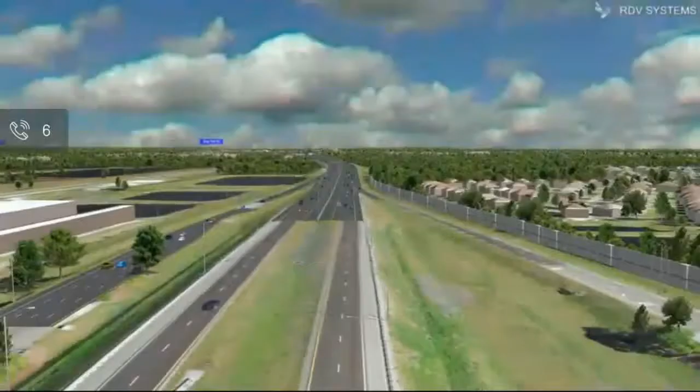So first, this may take just a couple seconds to start rolling, but we'll look at the video of the tour. We start at the southern end of this project near Narcoossee Road. You'll see Stratford Point with its proposed sound wall on your right.

We're traveling northbound on State Road 417. Ahead of you, you'll see a structure that stretches across the road. That's the new electronic overhead sign gantry. Continuing north, the bridge that we're about to cross spans the OUC Railroad.

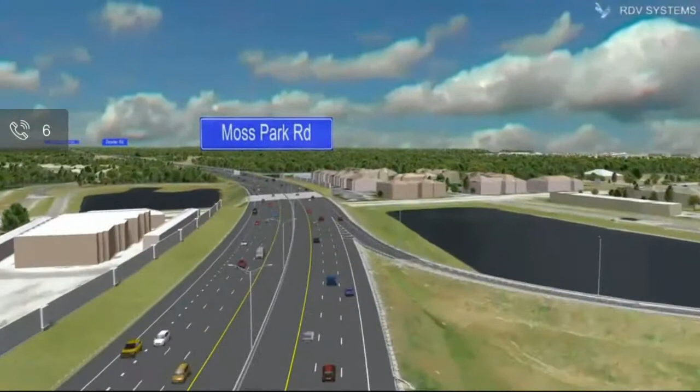And that's Nona Terrace coming up on your left. You'll see the proposed sound wall adjacent to the community. Approaching Moss Park Road now, you see the Oasis at Moss Park on the right and its sound wall. Across State Road 417 is the Villas at East Park. Again, its proposed sound wall runs the length of the community.

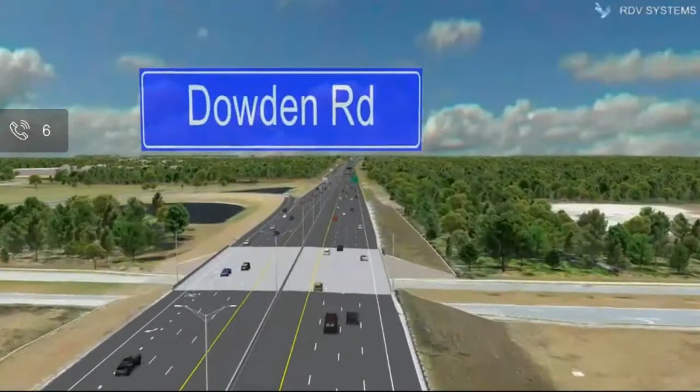And right now, we're passing the exit to Dowden Road on our right. And approaching Dowden Road, there's another one of those overhead sign gantries. You're getting a good sense now of how the expressway is being widened to the middle, or to the median. Note the lighting in the median. Also note the wider median shoulders that will allow traffic to keep moving, albeit slowly, during emergency events such as traffic accidents or hurricane evacuation.

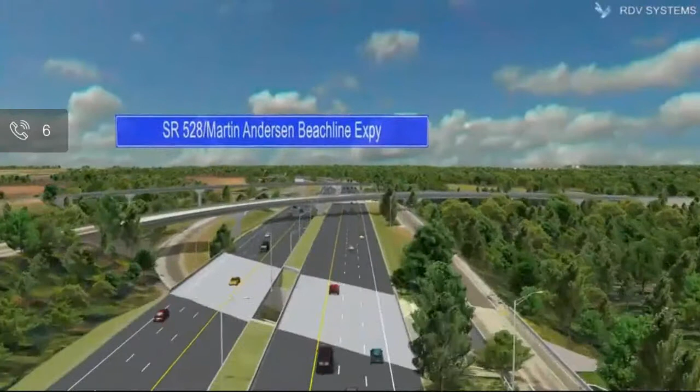Coming up on our right is the exit to State Road 528 as we approach the interchange with the Beachline Expressway. And coming up here, note how the median returns to a grassy area. This is where this project meets the earlier widening of State Road 417 from this point to Curry Ford Road. In fact, CFX just recently completed the 6-laning of State Road 417, the Greenway Expressway, from State Road 528 all the way past the Orange County Seminole line.

This widening of State Road 417 from Narcoossee Road to State Road 528 is one of 5 segments that will 6-lane the Greenway from International Drive to State Road 528. So with the completion of those 5 projects, the whole CFX-owned portion of State Road 417 will be 6-lane. And that ends that video.

We're now going to go to a screen share. Give me just a moment here. I'm going to share my screen, so you'll be able to see this virtual tour and we'll demonstrate. And by the way, this will be loaded onto the project page by Monday, so you'll be able to go in and really play around with this. And that's what it's for. It gives you the opportunity to go in and view what this project with the roadway looks like now, and what it will look like after the project is complete.

So as you can see here, we're at the southernmost portion of the project corridor at Narcoossee Road. We're looking kind of north at this point. Right here in front of us, if you can see my cursor, we're looking at the entrance ramp to northbound State Road 417 from Narcoossee Road. If you put your cursor on this picture and you hold your mouse button down and then move it around, you can look 360 degrees around. You can look up, you can look down, left, right. So that's pretty cool to give you a view of what that looks like.

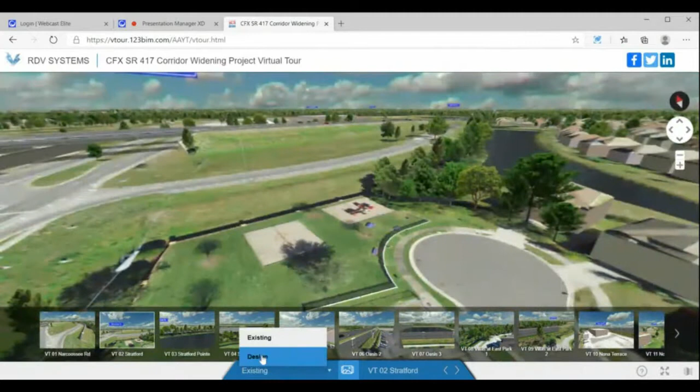At the bottom of the screen here, you see these various thumbnail pictures. Those are the predetermined locations that we thought might be of most interest, especially to the people living along the corridor. So let's go through that. Let me show you the first one, and I'm going to go back to existing. This is from the Stratford Pointe community, right by the playground. This is the existing view. If we go to design and what it will look like after the project, here you can see the sound wall. And here back over to the right side of the screen is the community.

Let's go down to the camera view that shows the easternmost part of the Stratford Pointe community. Let's go to that camera. Here we're looking west. Here we're looking east. And this is the view currently from this position at the eastern end of Stratford Pointe. If we go down here to this blue tab and we click on design, this is what it looks like with the addition of the proposed sound wall.

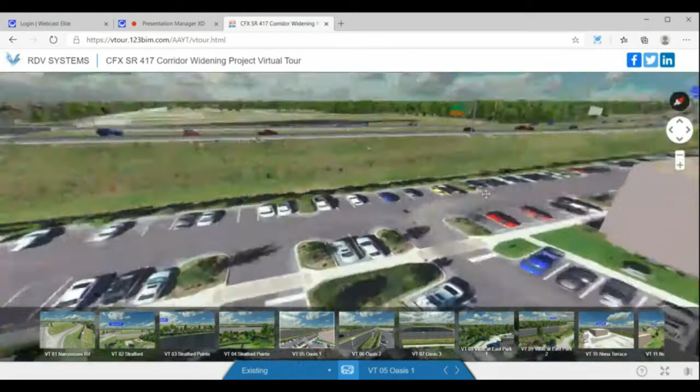We'll just go down to a couple other points to show you. This is the Oasis at Moss Park. This is the southernmost end. This is what it would look like after the completion of the project. And this is what the folks at the Oasis see now. And if we're looking this way, again, design.

We're going to go to the northernmost part of the Oasis. And this is obviously after completion of the project. And you can see that the wall here comes around this retention pond. And Will and I are going to talk a little bit about that, the reasons for that. But we wanted you to see that.

We'll skip over across the other side of the road to Villas at East Park. And this is the southernmost portion of Villas at East Park. We do have a northern glance at that as well, loaded onto this. This is what the folks there see currently, no wall. And then this is after the wall is added.

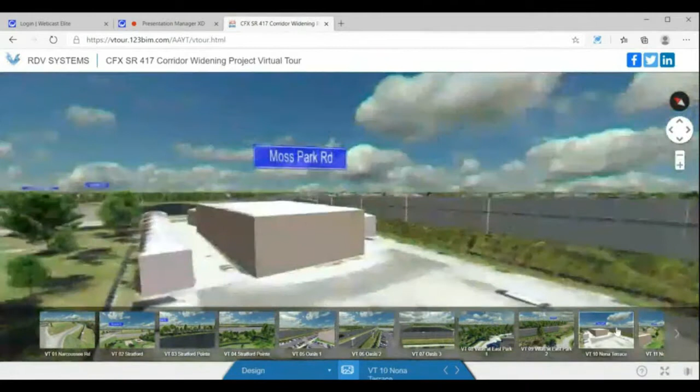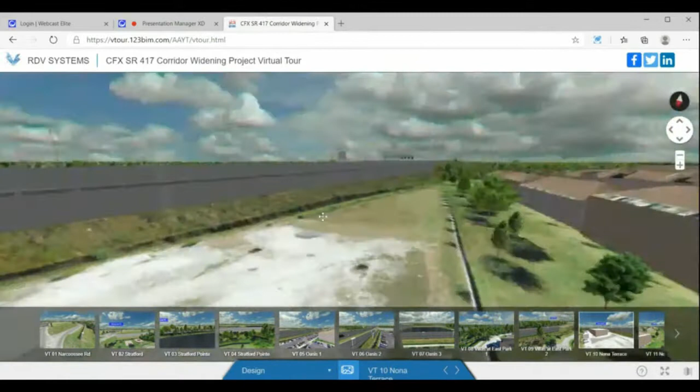And then finally, if we head down to Nona Terrace, this is with the addition of the wall. This is a storage business right there. We can look to the south and see how that wall runs all the way down. And we'll go down to the, here is the southern end of Nona Terrace. This is what it looks like today. This is what it will look like at the end of the project. So you can see that sound wall should provide some deadening of the noise.

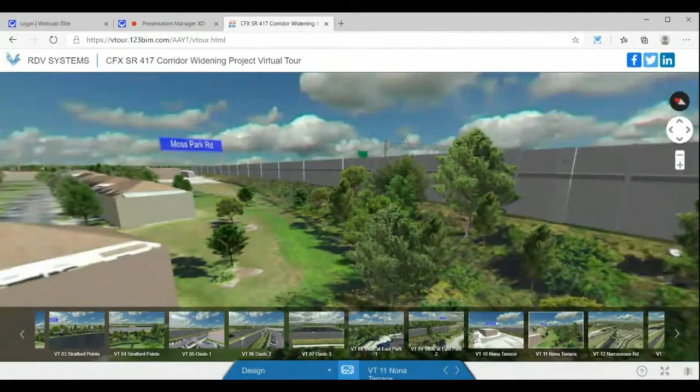So I'm going to stop sharing now and we'll go back to the presentation. And again, that will be loaded onto the website. So please take advantage, go in, look around, ask questions.

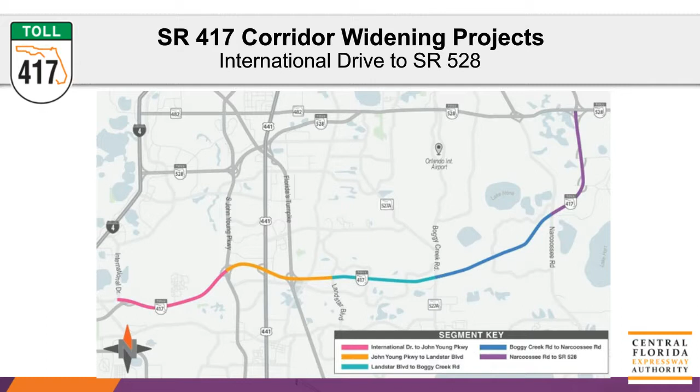CFX is widening 22 miles of State Road 417 from International Drive to State Road 528 to improve traffic flow on one of our system's busiest expressways. Each day, up to 95,000 vehicles travel this stretch of State Road 417, and that number is expected to continue growing. This widening initiative is broken into 5 segments to minimize impacts to motorists. During this meeting, we'll focus on the 5th segment to be constructed, from Narcoossee Road to State Road 528.

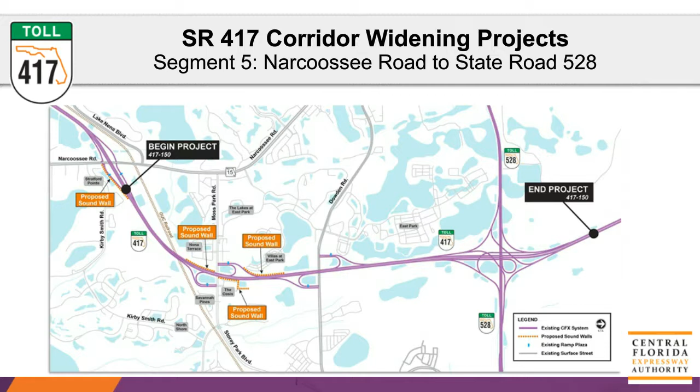This segment includes widening State Road 417 by adding a lane in each direction, expanding the expressway from 4 to 6 travel lanes in total. CFX is also adding wider median shoulders that can temporarily accommodate additional traffic during emergency response events, such as traffic accidents or hurricane evacuations. This segment includes 4 proposed sound walls. During design, a noise study following state and federal guidelines is conducted to determine noise impacts associated with the expressway widening. The study identifies noise-sensitive sites such as homes, schools, churches, and recreational areas along the project corridor.

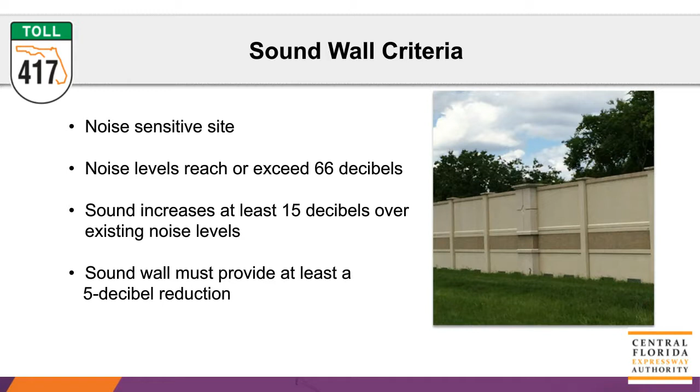For these projects, sound walls have been considered for areas predicted to experience noise levels that reach or exceed 66 decibels or experience an increase of 15 decibels over existing noise levels. Additionally, the sound wall must provide at least a 5 decibel reduction to be considered feasible. 66 decibels would be slightly louder than heavy traffic at 300 feet away. 15 decibels compares to the noise you would hear at night in a rural area. Think crickets. There's also consideration involving the cost for benefited property.

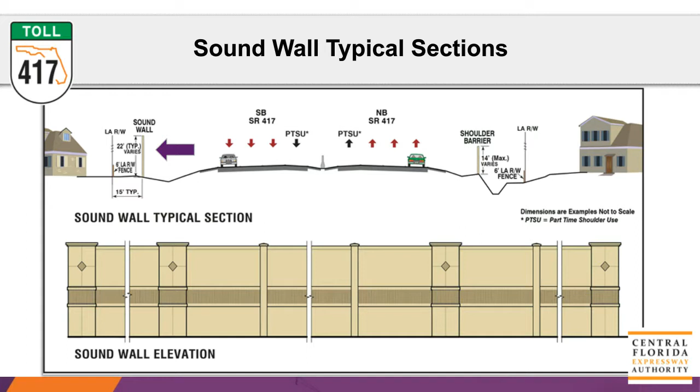Construction on the 5th segment from Narcoossee Road to State Road 528 is expected to begin in summer 2021 and is expected to be complete in winter 2023. In addition to the widening, there are 4 proposed sound walls along this stretch of the expressway, noted by the dotted orange lines along the expressway on the map. Next, we'll zoom in and focus on each location where the sound walls are proposed from Narcoossee Road to State Road 528.

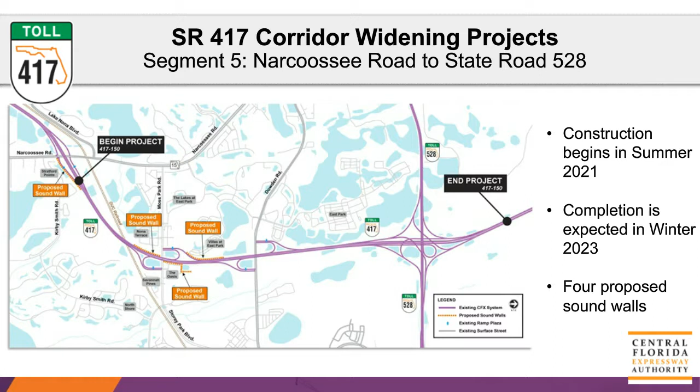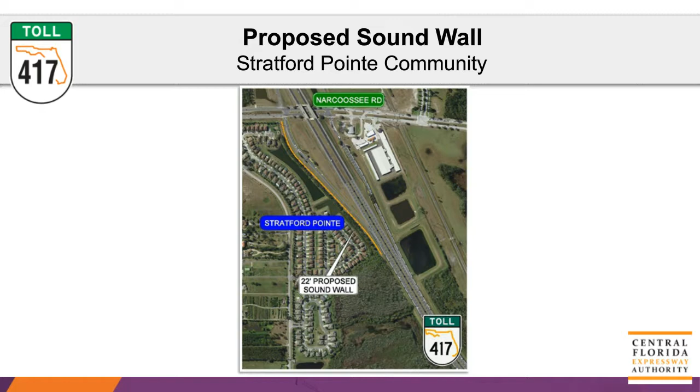This aerial map shows the sound wall proposed at the Stratford Pointe community. This 22-foot tall wall runs along northbound State Road 417 and is located inside the right-of-way line, starting at Narcoossee Road. It's nearly 2,200 feet long, just under half a mile. On this aerial map, you see that sound wall near Stratford Pointe on the left. Across the expressway on the right side of the picture, you see the ramp from southbound State Road 417 to Narcoossee Road. The toll plaza on this ramp is being relocated about 500 feet up the ramp and will be redesigned into a new all-electronic tolling gantry.

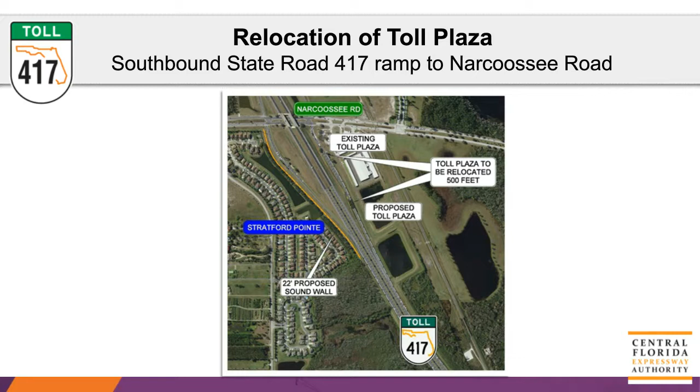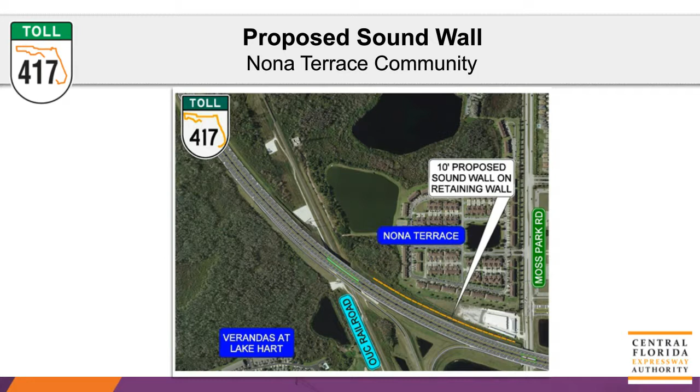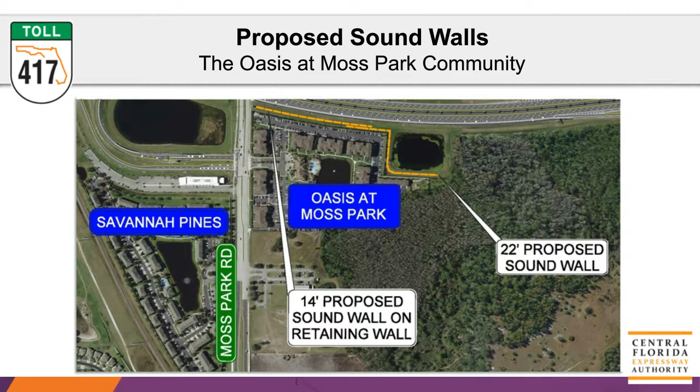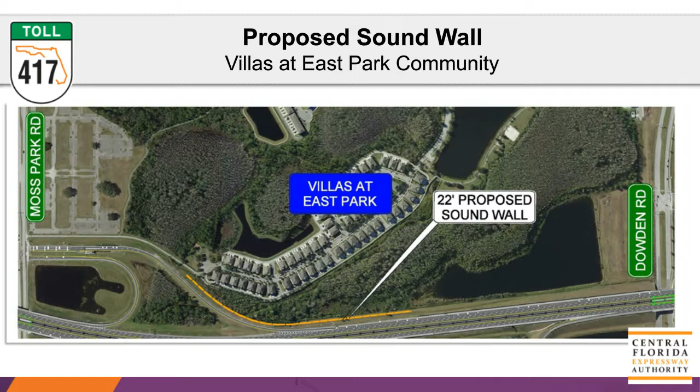And again, we hope that this information has been helpful. Don't forget to leave your comments regarding this segment of the State Road 417 corridor widening project. These comments must be submitted by October 16th, 2020, in order to be entered into the public record. Just click on the Q&A tab at the bottom of the screen during this meeting, or send your comments to construction@cfxway.com. Following this virtual public meeting, a copy of this presentation will be posted to the CFX website at cfx-417corridorwideningprojects.com.

So again, we are going to show you the video of the fly-through, if you will, of this segment of 417, of the widening. And I just need you to hold on with me for a moment. I've just got to get my screen situated. And we'll start this in just a moment.

So this video is a fly-through of what the widening and the sound walls will look like. And then after that, I'll share my screen and give you the quick demonstration of this terrific tool that allows you to go in at predetermined points and see what the before and after will look like. So that's pretty neat. Let me go ahead and start this video. We'll get that underway.

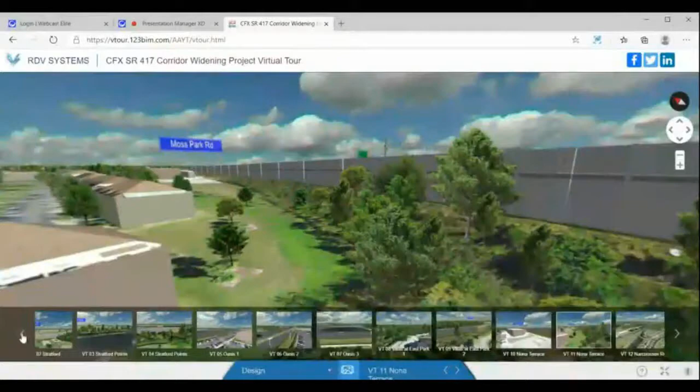So that gives you a good sense of what that will look like when that's done. So now I'm going to go to screen share, and I am going to show you this virtual tour, and you'll see this on the website. We'll have this posted to the project website by Monday. And for anybody who wasn't here when we were showing this earlier, real quickly, at the bottom of your screen, you see multiple little thumbnail pictures. Those are predetermined locations along the corridor.

If you click on one, and I'm clicking on this first one, you see that we are at the southern end of the project corridor. We're right at Narcoossee Road. If we look to our east or to our right, this is the entrance ramp from Narcoossee Road to northbound State Road 417. Now, currently, there is no wall here. This is what conceptually it will look like at the end of the project.

If you look down at the bottom of your screen, you'll see this blue tab. It currently says design. If you go over to this little arrow, click on it, hit existing, and that's what this area looks like currently. If you go down, click on that arrow, hit design, this is what we believe it will look like at the end of the project. So with these little thumbnails down here, there are various views along the communities, from the communities.

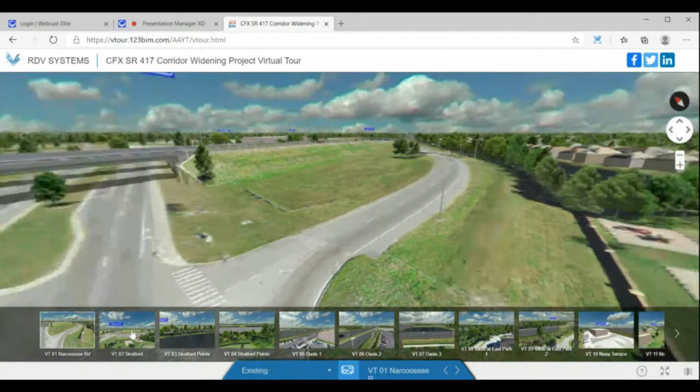If we go to this first one, and I'm going to right now go back to existing, this is from the Stratford Pointe community, the far western end of the community. Here is the playground for the community. This is what it looks like now, with that entrance ramp. If we go down to that blue tab and we click on design, this is what it will look like at the end of the project.

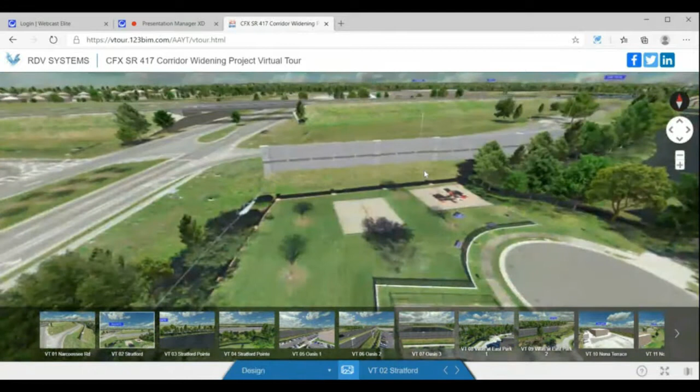If we go, let's say, down to the far eastern end of Stratford Pointe, again, I'm going to go back to existing, down here at the bottom of the page so we can see what that looks like now. So there's State Road 417. You can see the rooftops right here of the homes. Those are the homes in the far east end of Stratford Pointe. And those residents can see back out to the roadway. If we go back down again, we click on that arrow and we go to design. This is what this will look like at the end of the project.

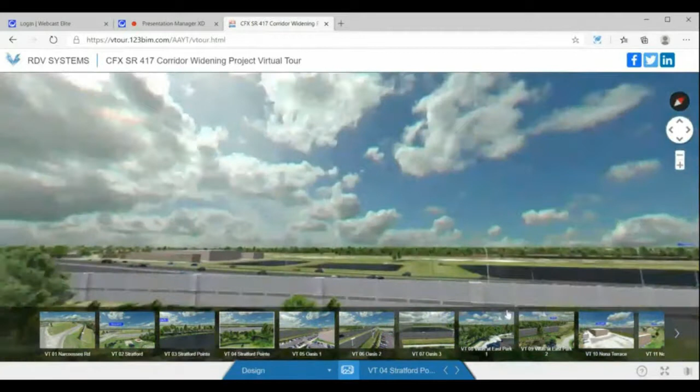And if you put your cursor on the screen and you click your mouse button or the left pad on your laptop, you hold that down and then you can just look all around 360 degrees. You can look up, you can look down. So it really gives you a good opportunity to view what that looks like.

Let's go ahead and head over to the Oasis at Moss Park. I'm going to go back to existing. And this is the Oasis at Moss Park currently. This is the southern end of that community. And this is their view. You can see Moss Park Road right there to our left. If we go to the design view, the road essentially disappears from their view.

And we will go down to the northern portion of the Oasis at Moss Park. You can see how the wall comes around the CFX-owned retention pond. And as Will Hawthorne explained earlier, two reasons for that. One is that from the noise analysis, the closer to the affected property that you can get the wall, the more effective the sound barrier is.

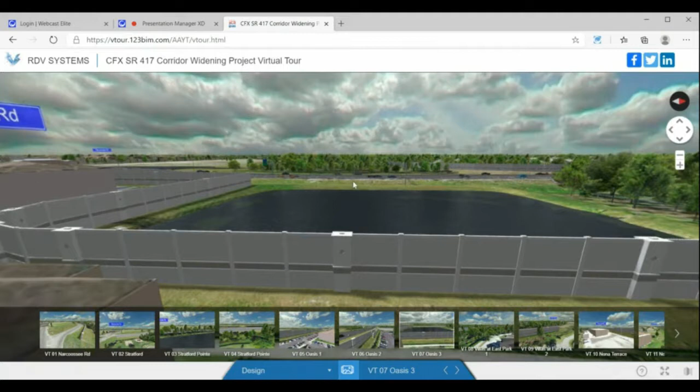The other reason is that this is the CFX-owned retention pond, and maintenance workers need to get in to maintain the pond, to maintain the grassy areas around it, and access to those CFX retention ponds is from the roadway. So they need to be able to get in there. So that will give you a good sense, I think, of being able to go in, play with it, see what that looks like, and come back to us after you do that and ask questions.